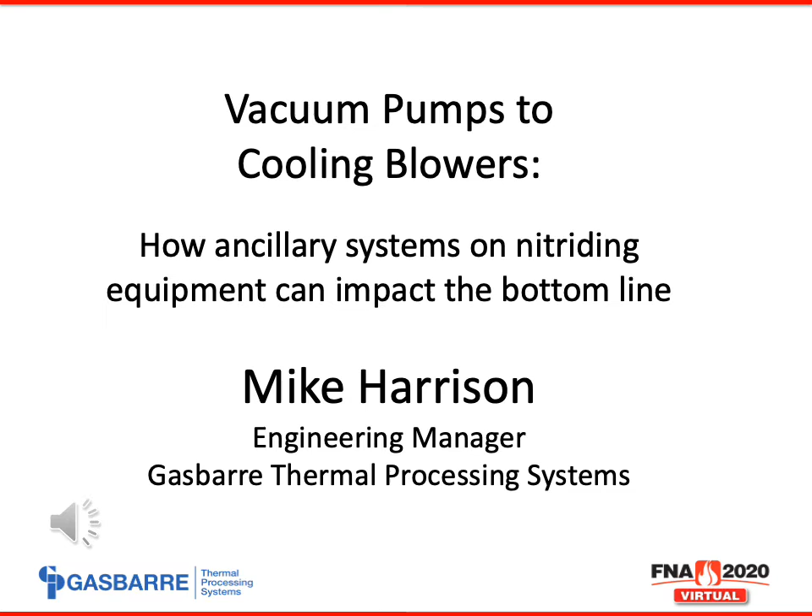Just a little bit about myself. I'm the engineering manager at Gasbarre Thermal Processing Systems in their Industrial Furnace Systems division. I have a Bachelor of Science in Engineering in Material Science and Engineering from the University of Michigan. I have an MBA from Walsh College. I have about 15 years of commercial and captive heat treat operations experience working in quality, operations management, and general management. And I'm a graduate of the 2019 MTIS program.

In this presentation, I'll spend a little time talking about the nitriding cycle with a brief overview of the process. We'll talk through some of the various ancillary systems that might be offered as part of a nitriding furnace package, including vacuum pumps, external cooling systems, and atmosphere cooling systems. We'll talk through some test results on how these systems perform and their impact on the nitriding cycle. And then we'll talk through some of the potential savings that adding these systems onto a nitriding system can offer. And then finally some last acknowledgments from our testing.

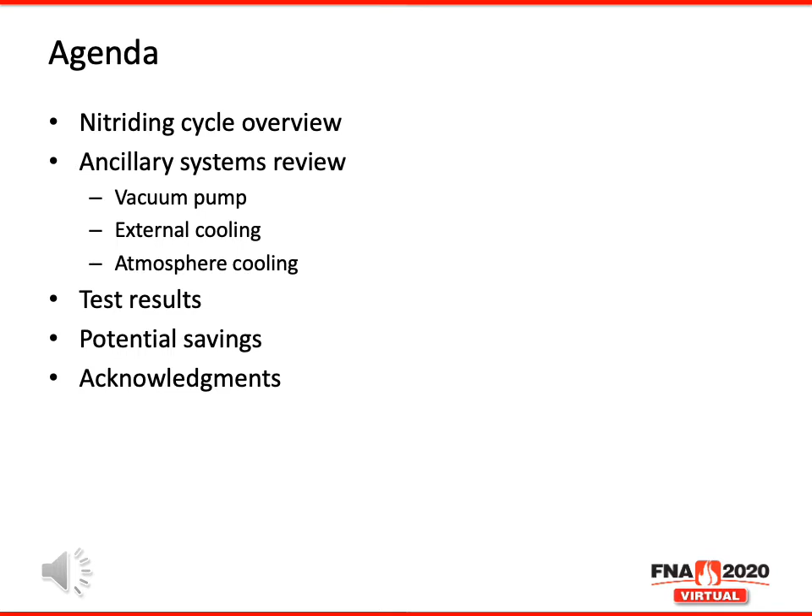It's not really a secret in our business that time is money. In most cases, the goal is to get the parts in and out of the furnace as quickly as possible. Unfortunately, nitriding typically is a slow process, and so it works against us in terms of time. The diffusion of nitrogen is slow in order to develop the case depth and white layer required as part of the process. And the user doesn't really have too many options to speed that up. You may be able to run a little bit hotter, adjust some gas flows or atmosphere parameters, but you're really usually limited in the final requirements of the part in terms of surface hardness and case depth.

So what about the rest of the cycle? Do we have options there to try and speed up the time before nitriding and the time after nitriding?

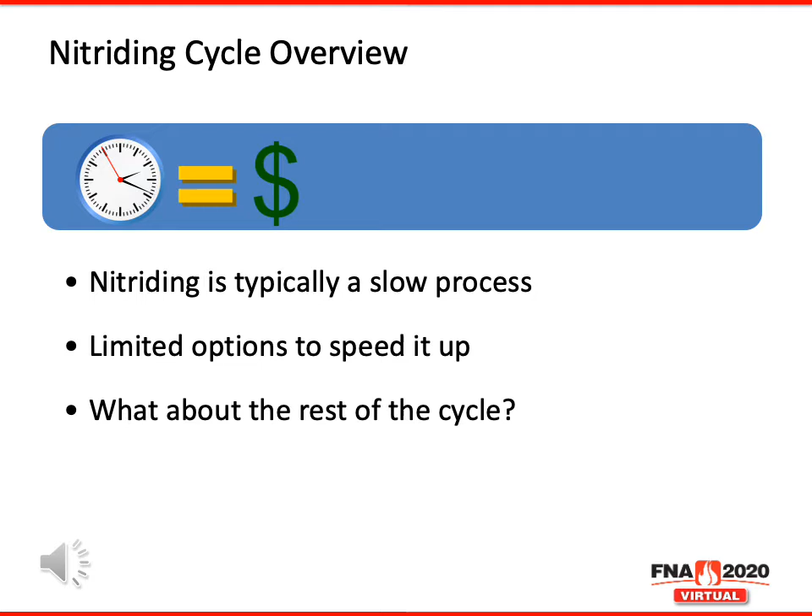Here we have an example of a typical nitriding cycle with the basic process steps shown. A first step might be a purge of the furnace chamber to help remove any air or oxygen from when the chamber was loaded. Usually this would be done with an inert gas such as nitrogen. Then you'll heat the furnace up. Sometimes there might be a pre-oxidation step included. So there'd be a brief hold at an elevated temperature. Air is added to the furnace chamber for oxidizing. But then after that, another purge step would have to be completed, as you need to remove any air or oxygen from the furnace chamber prior to ammonia being added. Those two gases at elevated temperatures can create a dangerous and explosive situation. So that'll need to be purged out first.

Then you can proceed on to heating up to the desired nitriding or nitrocarburizing temperature. And during this step, it may be beneficial to start flowing some ammonia to the furnace to allow some dissociation to occur and to help get the atmosphere settled prior to reaching your set temperature. Then you proceed on with your nitriding and nitrocarburizing step as required. And then finally, there'll be a purging and cooling step to stop the process and to get the parts to a point that they're cool enough to then remove from the furnace chamber.

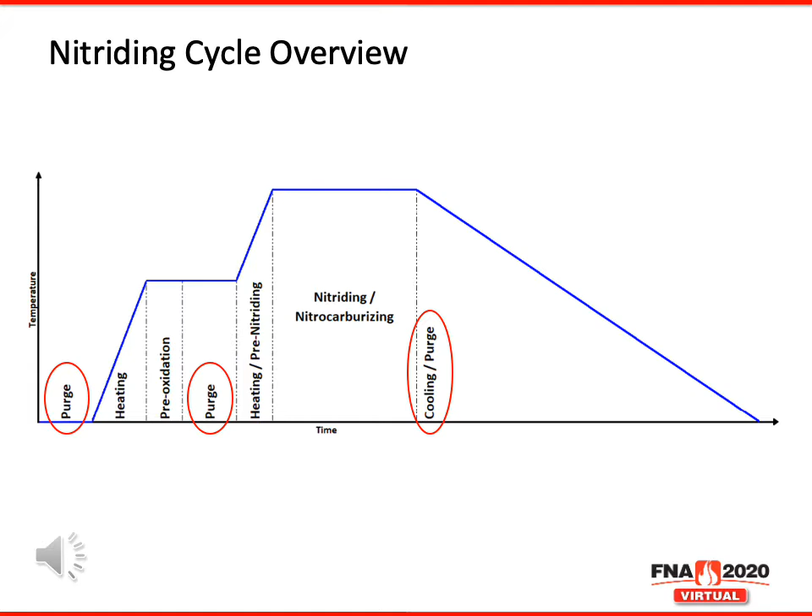So what if we can take that time and temperature profile and shift it to the left by reducing those purge times and cooling times to create an overall shorter cycle? Our nitriding time itself is the same, but now those times before and after those steps have been reduced, to help us improve that overall cycle time.

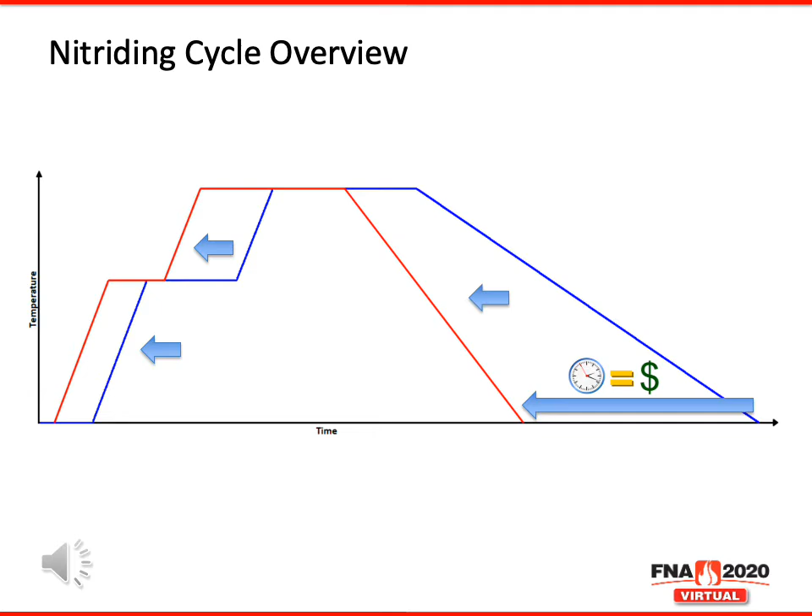So one of the first options that we have to look at to add to a nitriding furnace is a vacuum pump. Now, these furnaces are not designed to be a true vacuum furnace, but we can use the vacuum pump to help on the purging steps, to help speed that up and to help ensure that we've got the furnace fully purged of any air or oxygen that could be in the system before adding any ammonia.

So the model shown here, and you can see the system highlighted in green. You have a vacuum pump, and then the associated piping and valves to draw the atmosphere out of the furnace retort, through the vacuum pump, and out the exhaust at the top of the furnace. And again, along with associated valves to keep the pump isolated from the ammonia atmosphere while the process is running.

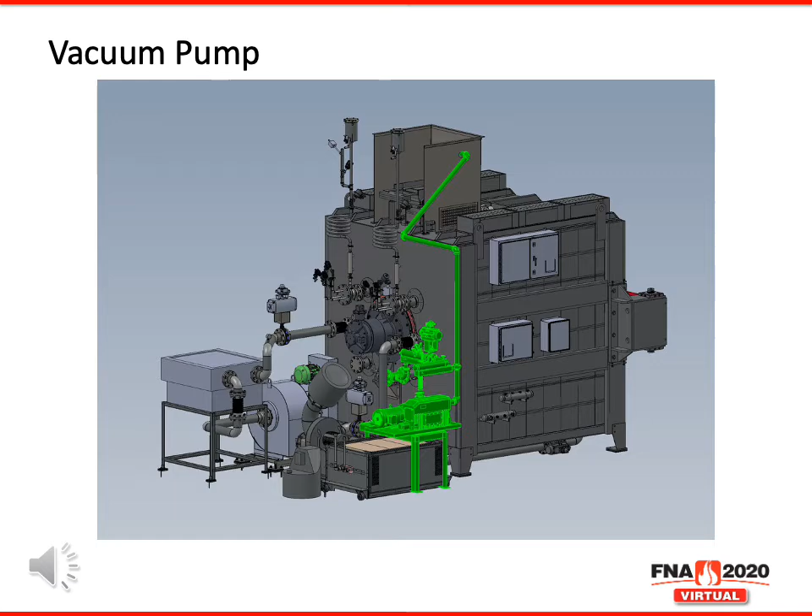The next system consists of an air blower, piping, and valves that run underneath the furnace and into the furnace chamber to provide that external cooling. Something that we have available to add to a nitriding furnace is an external cooling system.

And so the way this furnace operates, there's a sealed retort inside the outer furnace chamber where the load sits, and that's where the process gases are added. That stays sealed up during the process, and so the heating system is around the outside of that retort, inside the outer furnace case that we're looking at here.

And so with the external cooling system, what we can do is, again highlighted in green here, we can take an air blower and we can run ambient plant air into that heating chamber on the outside of the retort. So the parts inside the furnace being processed are still sealed and protected. But then we can run air around the outside of that retort to help extract the heat from the retort and exhaust it out of the furnace to help speed up any cooling rates.

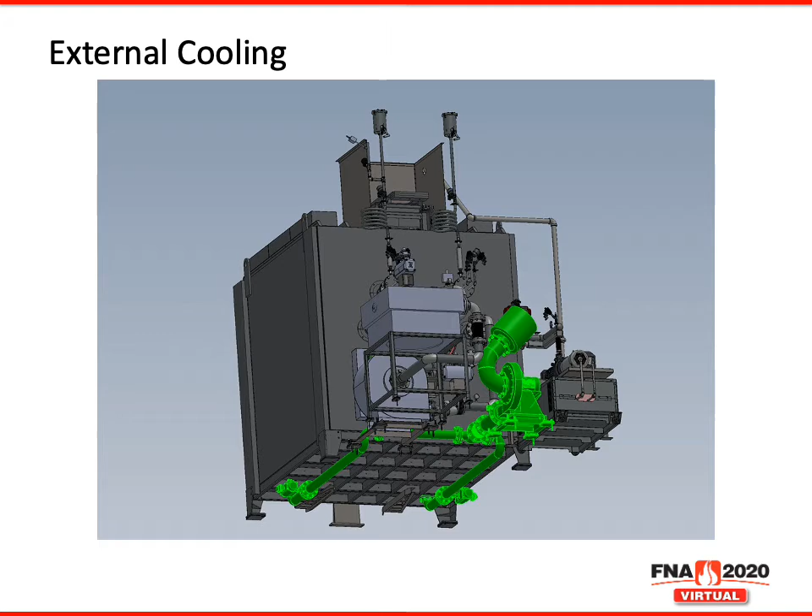The last system we're going to look at for this presentation is an atmosphere cooling system. The purpose of this system is to circulate the atmosphere that's inside the furnace, inside the retort, cool it down, and then send it back into the retort to help extract heat from the load that's being treated. And so this system includes a heat exchanger, a recirculating blower, and then the associated piping and valves to isolate that system while the nitriding process is running.

The heat exchangers typically used for these are not rated to handle ammonia, so the furnace will need to be purged prior to operating the heat exchanger loop. Although there are heat exchanger systems that can be used to help cool that can handle ammonia running through them as well. They do become more costly, but those are available if even faster cooling rates are desired, so those systems can come on immediately as opposed to waiting the appropriate purge time first.

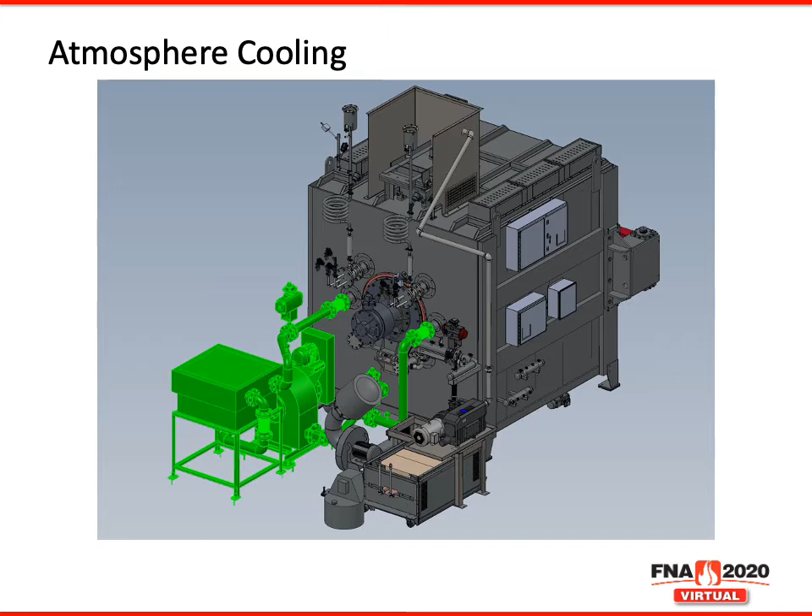But for the purposes of the testing that was done for this presentation, we used a heat exchanger that could really only see a nitrogen atmosphere, so there was some purge time required prior to starting this heat exchanger loop. Now I'd like to get into looking at the test results from each of the ancillary systems presented.

So first I'd like to define some of the test parameters. The furnace load size that was used for these tests was 48 inches wide by 72 long by 40 inches tall. The furnace had a rated load capacity of 7,000 pounds. There was a 5,500 pound load placed in the furnace during these tests. And the furnace was run up to 1050 Fahrenheit prior to the start of the cooling cycles.

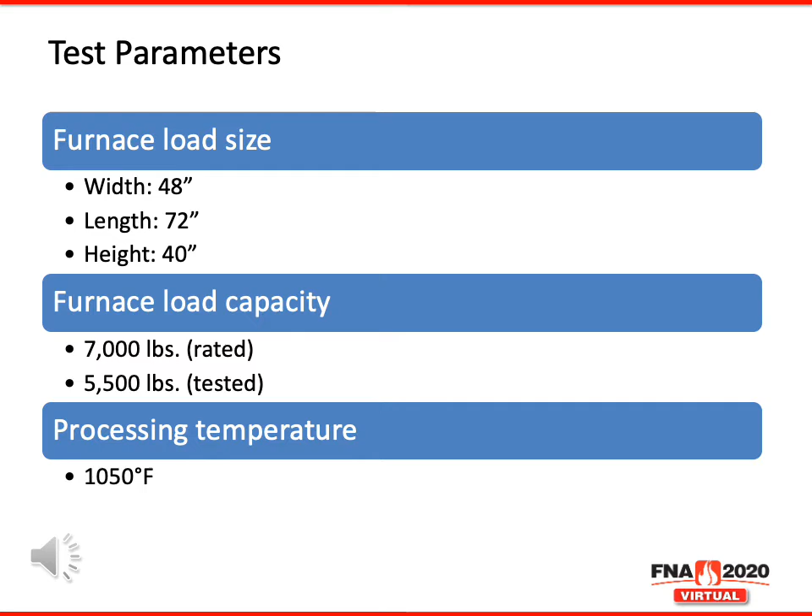First we're going to look at test results using a vacuum pump.

If we only purged the furnace using nitrogen, the furnace has an available flow of 1,000 cubic feet an hour. The total volume to be purged, which to meet safety requirements per NFPA would be 5 volume changes of the retort before being considered acceptable to add ammonia to the system. So we had to purge a total volume of 1,375 cubic feet, and that's a time of 83 minutes to complete a single purge step.

If we look at using a vacuum pump to achieve a similar purge step, the vacuum pump used takes 15 minutes to reach a vacuum level of 5 torr. Then there's a nitrogen backfill that has to occur to repressurize the retort prior to proceeding on the cycle, and that's about 15 minutes as well. The total gas used during this time was 250 cubic feet. So in all, there's a 53-minute savings by replacing just a purge-only step with instead using a vacuum pump with a nitrogen backfill afterward.

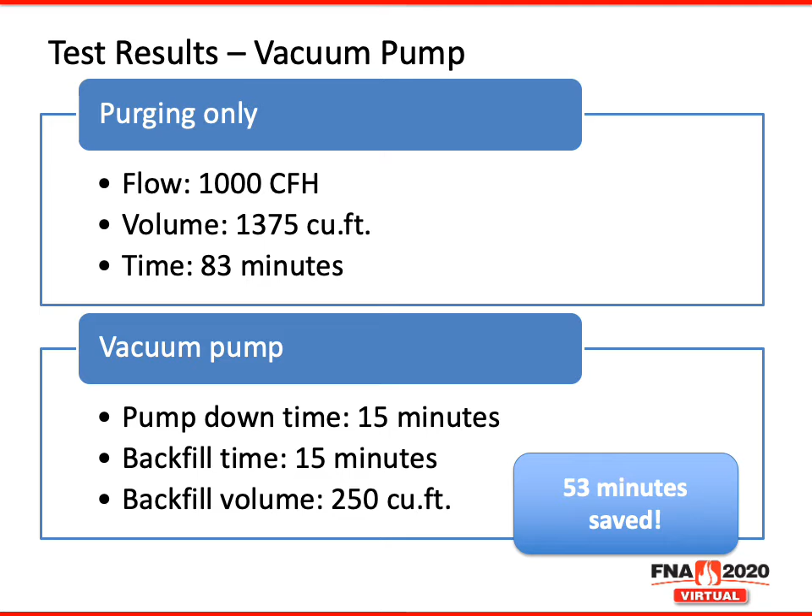Next we can look at the trials run on the cooling systems. If you look at the graph here, you can see the cooling rate over time for the various cooling systems. The red line at the top is no additional cooling on the furnace, simply turning the heating system off, leaving the recirculating fan running, and allowing the furnace to cool naturally on its own. As you can tell, it's a very slow cooling rate. If you were to extrapolate that line out to reach the 200 degree cutoff we were shooting for, it looks to be about 6.5 days of cooling time, which is by no means practical for any operation.

So then if we look at using the external cooling system, this would be the green line on the graph. This system is just the air cooling around the outside of the retort, significantly improved over no cooling whatsoever. That cooling rate to get down to about 200 degrees ran about 8.5 hours.

Then the blue line shows adding the atmospheric cooling system in addition to the external cooling system. This would be recycling the nitrogen that's in the retort out through the heat exchanger and back into the retort again. As mentioned previously, there's a purge time that has to occur prior to allowing that heat exchanger to start. You can see where the blue line starts to split from the green line as the cooling rate increases once we're using the atmosphere cooling system, and that gets us down now to about 5.5 hours cooling time using both systems.

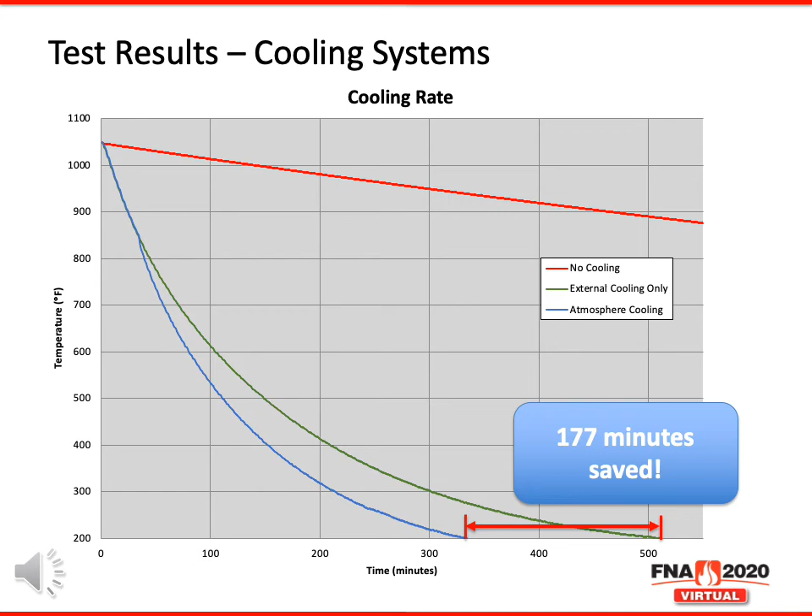Now as we start to get into some of the savings and justifications that can be used for these systems to be added to a furnace, first we've set up some assumptions on the cycles and what you can use to help justify these systems. Again, these will vary based on your particular process requirements or needs.

Both a nitriding and a nitrocarburizing cycle typically could be performed in the same furnace. We're assuming, for the sake of our conversation, the purge step would be 1 per cycle. The total cycle time on a nitriding cycle, again, these times will vary based on a particular process or need, but a good average time might be 72 hours for a nitriding cycle, and maybe 14 hours for a nitrocarburizing cycle in this style of furnace.

So over the course of a year, again, depending on how many hours a plant or operation runs, you may be able to get 100 cycles in at 72 hours each, or 600 cycles in of a 14-hour nitrocarburizing cycle.

If we assume the cycles end at 200 Fahrenheit, the external cooling system, we assumed it would be included. As you could tell from the previous graphs, not having any type of cooling just isn't practical in any way, so we're going to assume that's already included as part of the system.

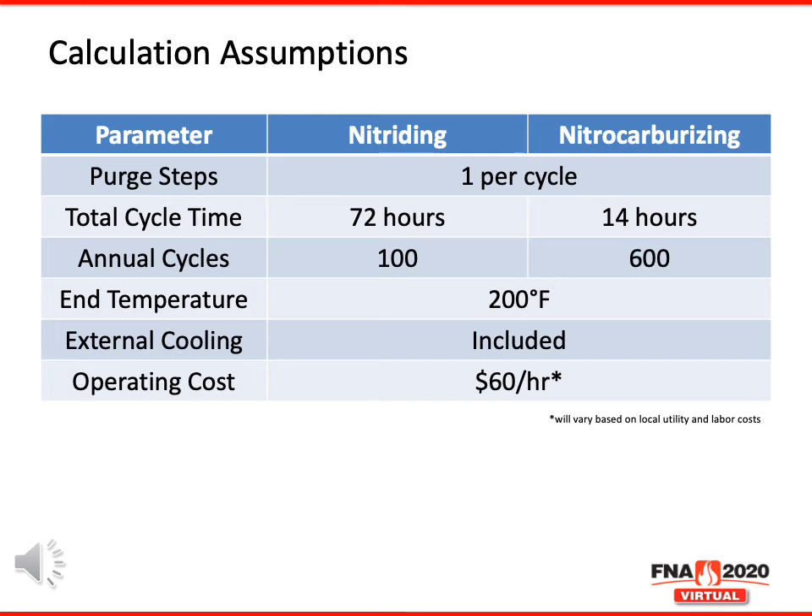And then the operating cost to run, a good average might be around $60 an hour. This would be including utilities, process gases, labor, and any overhead required. And of course this will vary as well, based on your local utility costs and labor costs for a particular operation.

So if we look at the vacuum pump with these cycle parameters, there was just under an hour's worth of savings at $60 an hour. It gave us a $54 savings per cycle. And so if we look at the number of cycles over the course of a given year, you can see on a nitriding cycle about $5,400 worth of savings.

On a nitrocarburizing cycle, again, you're running many cycles. There's many opportunities to run that pump and shorten the purge timing, looking at potentially $32,000 in savings.

And then with the atmosphere cooling system, it was just under 3 hours worth of time saved. Again, at $60 an hour comes out to about $174 per cycle. And again, over the course of a year, you can see just over $17,000 in savings on a nitriding cycle, and a significant savings, over $100,000 on running nitrocarburizing cycles — again, just by eliminating the amount of time required to complete those cycles.

So if we look at the combined systems, in total cost savings from an operating rate standpoint, exclusive nitride cycles are looking at potentially $28,000 a year in savings. From a nitrocarburizing standpoint, very significant, almost $137,000 worth of annual savings by adding these systems onto a furnace.

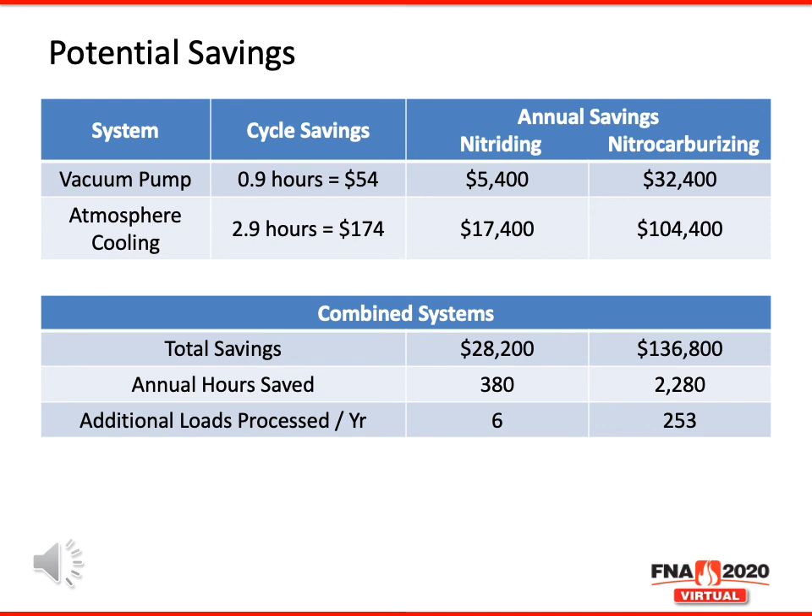So just to recap, time is money. It's really as simple as that. So when these ancillary options such as vacuum pumps, cooling blowers, heat exchangers are presented as additional add-ons or options to a nitriding furnace, they should really be considered. You need to look at what the benefits of those systems are and how they can help improve your operation from a financial performance standpoint.

They can generate additional revenue and additional savings. As we previously showed, the time savings that are generated free up furnace time that could be used for processing additional loads, and so additional revenue is created without having to necessarily expand the operation.

And these items are typically about a 1 to 3 year payback, potentially faster yet, depending on the product mix and the type of cycles that are run. But they really are quite affordable and can give a lot of benefit to the operation.